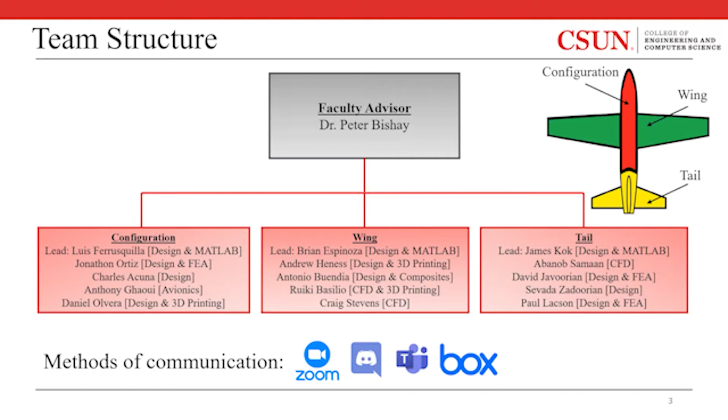And it's through these means of communication that we're able to complete every objective we set for ourselves, including first, designing a UAV that was capable of incorporating fully morphing wings and empennage. Second, designing proof of concepts for the wings and tail stabilizers that are capable of camber-morphing and non-stretchable skin. And lastly, manufacturing these concept models and performing actuation tests and wind tunnel testing.

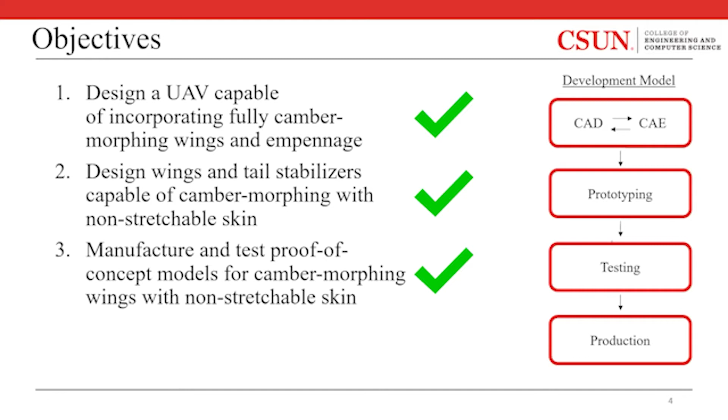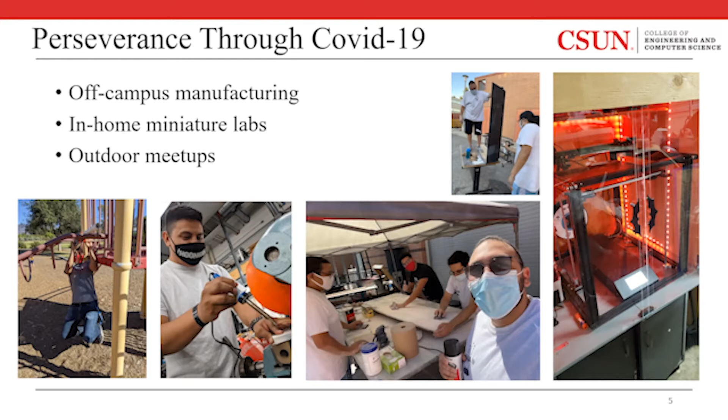And we succeeded with our objectives by using a standard computer-aided development model. We first designed our components using CAD software and CAE techniques, including FEA, CFD, as well as topology optimization, before eventually moving on to our prototyping and testing stage, and eventually developing our completed product. And none of this would have been possible without our team's dedication to doing great engineering work, despite the circumstances of these unfortunate times, where we completed most of our manufacturing off campus in self-made home labs, as well as having various outdoor meetups to stay as safe as possible.

And it was through this dedication and hard work that we're able to complete many milestones over the course of the year, including, as previously mentioned, the full actuation and wind tunnel testing of our proof of concept models, developing an in-house MATLAB application for dimension sizing of XM3, finalizing our UAV design, and the many conferences we've attended and awards we've earned.

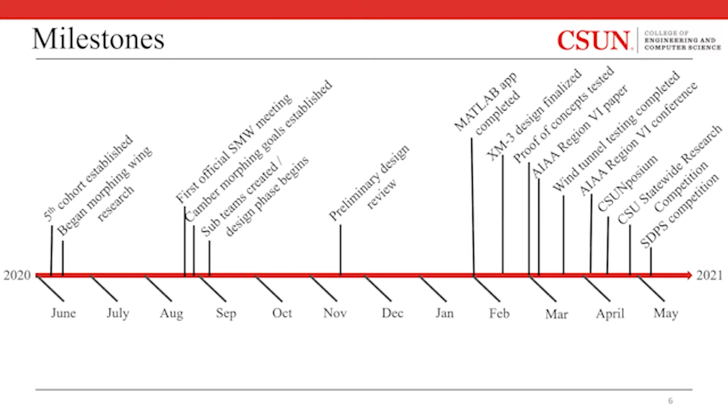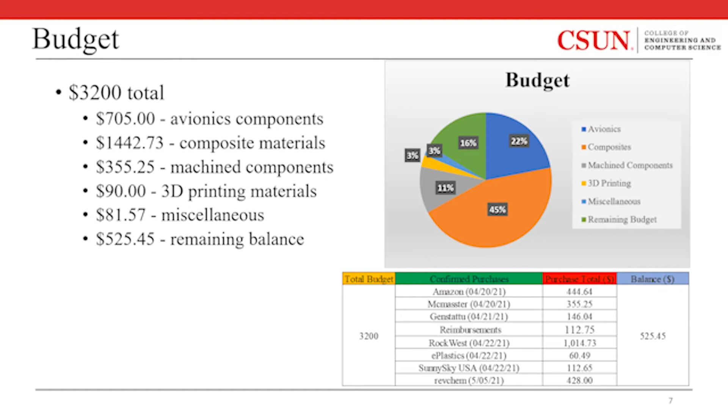And as for our budget, our team was allocated $3,200 to fund our project and research, where 22% of that was used for avionic equipment, 45% towards composites, 11% towards machined components, and 3% for 3D printing and miscellaneous items, which currently leaves us with $525 remaining, or 16% of our budget, roughly.

So now you're probably wondering, what is a morphing wing in the first place? So first of all, morphing technology is a concept of incorporating various surfaces on an aircraft that are reconfigurable during flight. If you look at birds, for instance, you'll notice that they're able to adapt their wings to better suit flight conditions. For example, they're able to increase their span, which increases their lift, or sweep them back to become more aerodynamic. And having these morphing abilities makes them much more efficient animals.

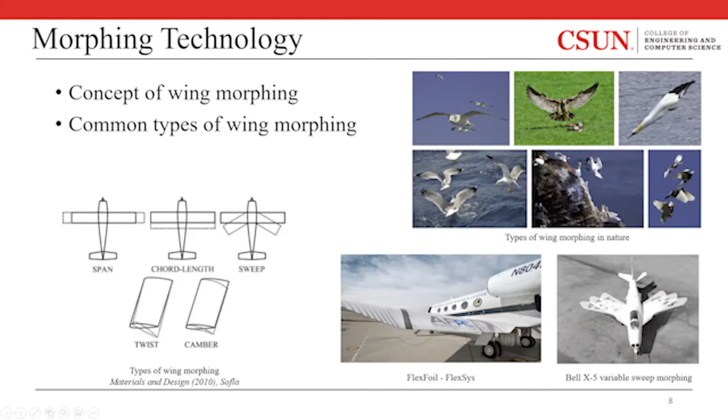And currently, there's a lot of research trying to replicate these capabilities with the intent of making aircraft more efficient in the same sense. For example, the Bell X-5 was an experimental aircraft that utilized variable sweep morphing. And currently, an aerospace company known as FlexSys is working on a FlexFoil, which is a type of camber morphing wing designed for full-sized aircraft, which is very similar to our research in that our team is also experimenting with camber morphing.

So a more accurate description of camber morphing is when the angle of the mean camber line is altered, which varies the amount of lift a wing can generate. And this allows the aircraft to maneuver similar to how an aileron or flap operates, except it uses a continuous surface and doesn't utilize a hinge joint. And having a smooth continuous surface greatly improves efficiency, which in turn can help reduce fuel consumption.

But the most difficult aspect of any type of wing morphing is making a skin that can resist aerodynamic loads and be flexible enough for morphing. Current morphing research tends to focus on stretchable skins such as polystyrene foam or polyurethane rubber, which is very weak to aerodynamic forces and tends to wrinkle from protrusions of the internal structures, which in turn leads to inefficient aerodynamic surfaces.

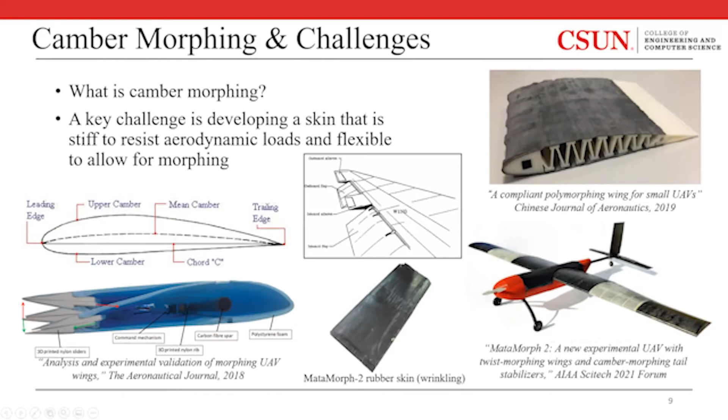So we present MataMorph 3. It's a fully morphing UAV that incorporates camber-morphing seamless control surfaces for the wings and tail. And we're solving this problem with the skin by using a laminate carbon fiber composite skin that connects to trailing edge slider mechanisms. And this effectively allows the skin to slide over the wing or tail, removing the need for the skin to be stretchable.

This also provides rigidity against aerodynamic forces during flight and a smooth continuous surface for the air to flow over.

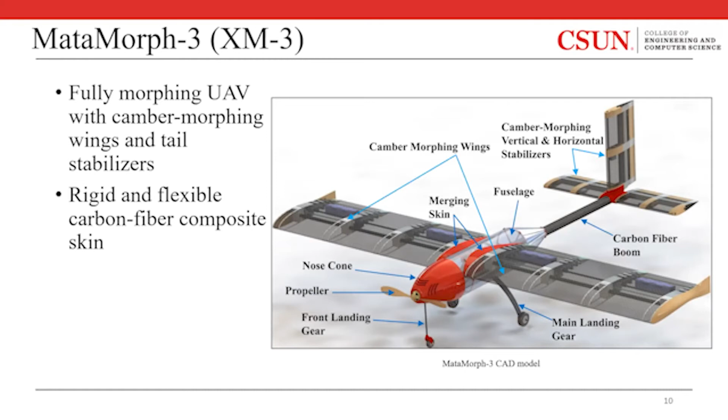And here's our innovative camber morphing design for the wing and tail. XM3 utilizes a laminate carbon fiber skin made of 2 plies of interwoven fabric that provide a rigid and smooth continuous surface. And our design also uses 3D printed skin supporting linkage mechanisms and trailing edge sliders to accommodate for the increase in surface area when cambering.

And the skin attaches to the leading edge of the rib and the trailing edge sliders to allow the skin to translate freely, and linkage mechanisms are placed between each pair of ribs to prevent separation between the rib and skin during camber.

And for the tail, a slightly different design was utilized, which involved trailing edge sliders that spanned the entire length of the trailing edge, as well as polyurethane foam sections, which acted as the linkage mechanisms in order to save weight.

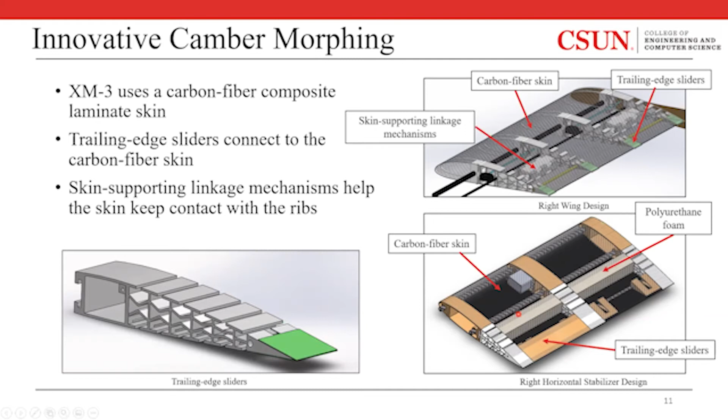So the design for the ribs is an improved version of the very well-known fishbone active camber design. But in order to further improve the design, we replaced the corrugated structures with V-lines and I-beams, which help reduce buckling along the central axis.

The actuation is then facilitated by a servomotor and a Carbitex CX6 ribbon, which runs through the rib and inserts into the trailing edge. And as you can see, again, the designs are very similar for the wing and tail. However, the tail rib utilizes a balsa leading edge to also further reduce weight.

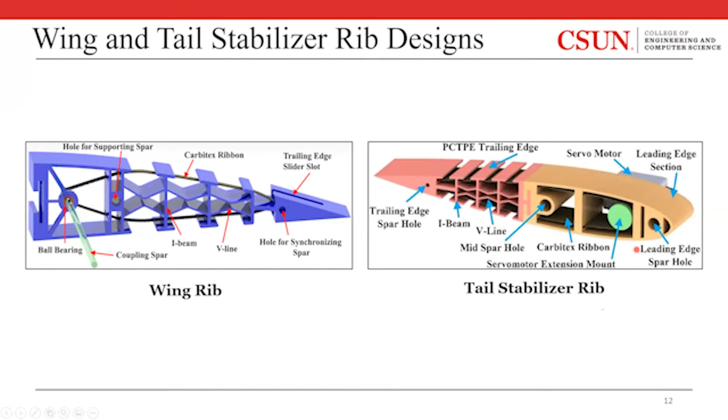So here's a design for our fuselage. It utilizes a carbon fiber central boom as the main support structure for the wings and tail, and the main landing gear made of 16 plies of interwoven carbon fiber, which is then fastened between two 6061 T6 aluminum bulkheads.

And as shown by the animation here, adjustable 3D printed ABS wing mounts made it possible for the wings to translate along the main boom, which allows the wing's position to be fine-tuned for the best location of the CG.

And here's a diagram of the avionic components of XM3. It uses an all-electric propeller-driven UAV that incorporates a Sunnysky brushless electric motor. It also utilizes two independent batteries, one to power the electric motor and the other to power the servomotors and auxiliary systems. And we're also utilizing a Pixhawk Cube 2 in unison with the GPS, as well as telemetry module to help gather data on flight characteristics, as well as our location.

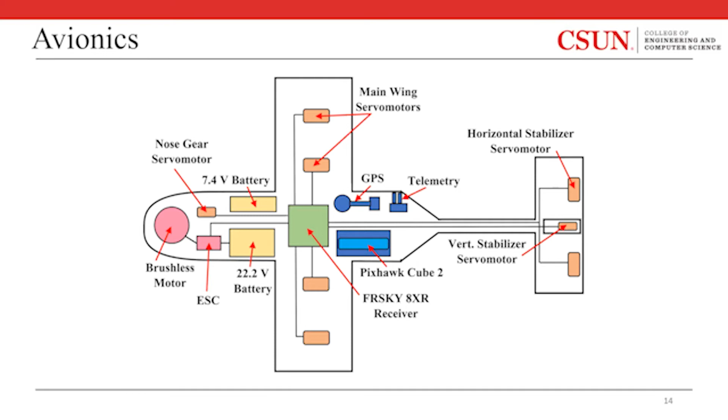And here's a preliminary design and sizing application that we developed in MATLAB and used extensively during the design phase for XM3. The app implements multiple tools with a graphical interface and 3D display to help determine optimal flight-worthy parameters for the wing, the motor, empennage, as well as center of gravity.

And the display updates in real time and allows the user to have a preliminary view of the UAV in order to intuitively assess the size of the aircraft. And I would really like to go more into detail about this application, but unfortunately, for the sake of time, we'll have to move on.

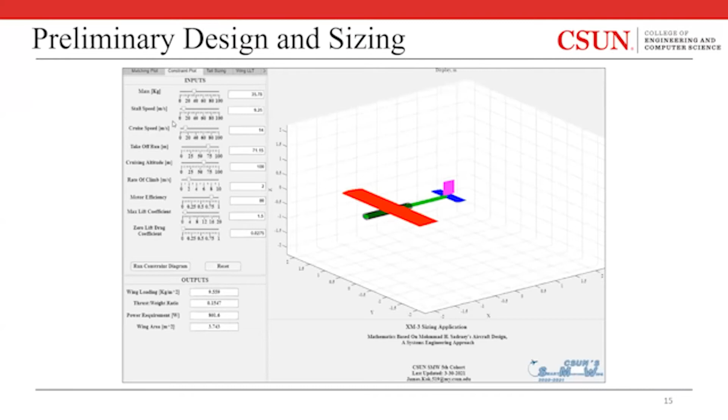The analysis of XM3 began with the bulkheads. The main and front bulkhead designs were refined using a new analysis tool found in SOLIDWORKS Topology Optimization Studies. The figures depict the optimization evolution of the bulkheads. The goal was to reduce the weight by 30% while maximizing the stiffness to weight ratio.

In each study, manufacturing constraints were applied such that the critical areas of the part were preserved. In the figure to the left, the area outlined in purple represents the preserved area needed to contour to the fuselage body. The central figure shows a mass reduction plot from the topology optimization study and illustrates which sections of the original shape could be removed for weight reduction.

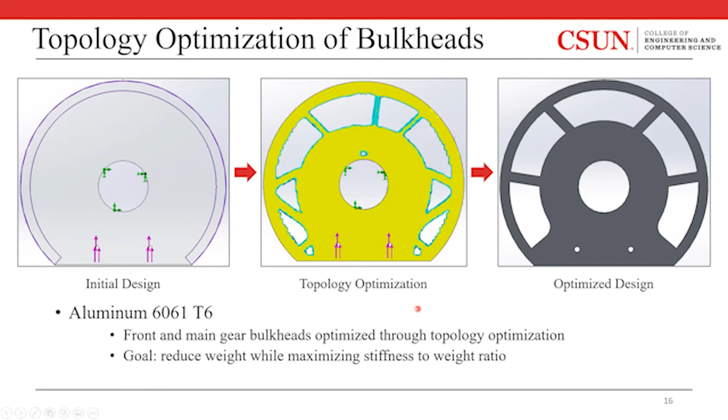The figure on the right displays the final bulkhead shape, which passed all FEA static studies with an acceptable factor of safety. Static analysis was conducted on the carbon fiber landing gear frame to determine the number of plies that would guarantee a suitable factor of safety.

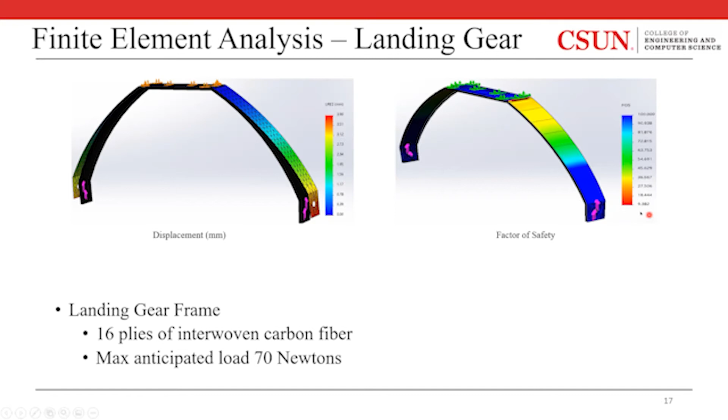A range of vertical landing speeds were considered, and a vertical load of 70 newtons was applied in a static study at the two ends of the main landing gear, where the wheels are attached. With the central part of the frame fixed as depicted by the figure, the applied loads resulted in a maximum displacement of 3.9 millimeters and a minimum factor of safety of 9.38. The mesh in all studies was refined until convergence was achieved.

Modal analysis on the frame was conducted to ensure that the anticipated excitation frequency during takeoff and landing, estimated to be between 20 and 30 hertz, is far from the first natural frequency, and to check if the mode shape results in any twisting of the frame, which would require several plies to have a 45-degree fiber orientation angle during the layup process. A conservative approach was taken in the modal analysis by defining no fixtures.

The first non-rigid body mode was a bending mode, shown in the animation on the left, and occurred at a frequency of 70 hertz. The second non-rigid body mode was a twisting mode, shown in the animation on the right, and it occurred around 170 hertz.

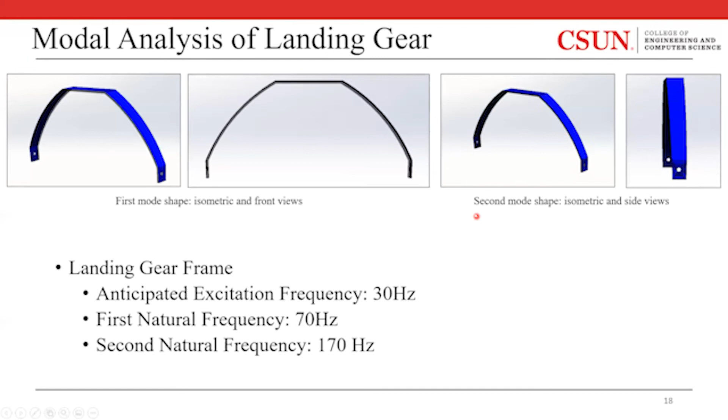Our analysis concluded that since resonance is unlikely to happen at this vibration mode, no plies with a 45-degree fiber rotation were necessary to implement into the landing gear.

The stress analysis for the carbon fiber skin aimed to show that the skin was able to withstand the maximum expected aerodynamic loads during flight. For this reason, a pressure of 495 pascals was applied for the study. The shell of the model consisted of two 0.3 millimeter thick interwoven carbon fiber plies. The figures show the resulting maximum displacement and factor of safety. The maximum displacement had a value of 0.098 millimeters and a factor of safety of 146.

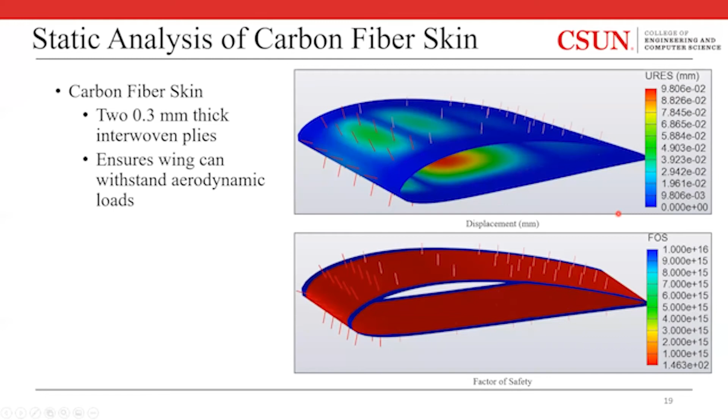The stress analysis for the main carbon fiber spar aimed to determine the minimum acceptable size that would be able to withstand the weight of the UAV. The model for the study had an outer diameter of 13 millimeters and was made up of 7 unidirectional carbon fiber plies with a stacking sequence of 00, 90, 90, 90, 00.

The spar was fixed like a cantilever beam and had an applied weight of 5.66 kilograms, roughly half the weight of XM3. The results showed deflection of 5.6 millimeters at the tip of the wing with a factor of safety of 33, indicating that carbon fiber tube of this composition would be suitable. We purchased a tube from Rock West Composites that offers similar material properties.

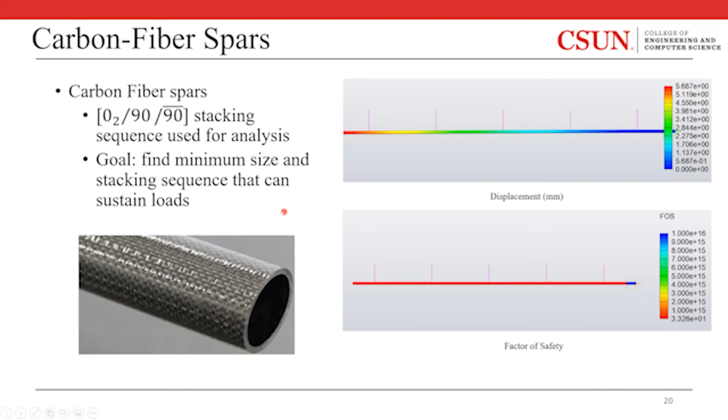ANSYS Fluent was used to carry out 2D static CFD simulations on the airfoils of both the wing and tail at different angles of camber. Each simulation had a flow domain of 7 meters in length by 4 meters in height. These dimensions were chosen to simulate a wind tunnel experiment, as well as the expected flight conditions, including the air properties at sea level. The inlet velocity remained constant at 20 meters per second.

A triangular mesh was used with a 0.1 meter element size along the outer boundaries and approaches sizes of 0.005 meters along the outer surface of the airfoil. The table shows the results of our ANSYS studies when they converged. The NACA 4415 values are a reference against established values by NASA. For our studies, the max aerodynamic efficiency peaks at 5 degrees of camber with a value of 30.63.

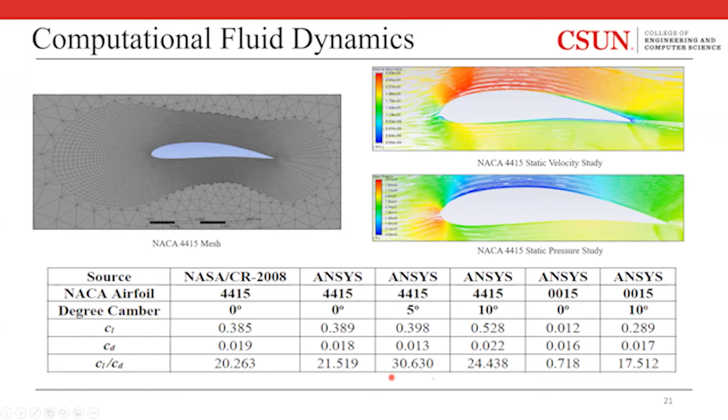We completed an actuation test for the wing model in the wind tunnel at school. The test showed that the wing was capable of cambering with applied aerodynamic loads at speeds of 40 meters per second, and that the skin was resistive to these loads as well.

Shown here is the expected flight path we plan to take with the help of our pilot at the Apollo airfield. The flight mission consists of performing a successful takeoff and landing, as well as having a flight time of 5 minutes. The main goal of this flight test is to demonstrate the effectiveness of camber-morphing.

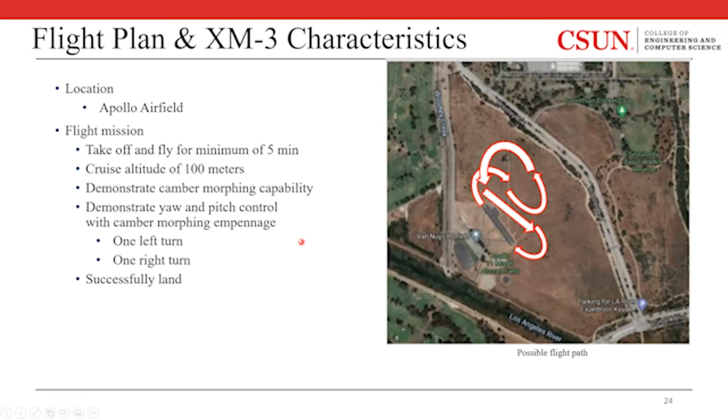Next, I would like to highlight everything that the 5th cohort has accomplished. First, we placed second at the 2021 AIAA Student Conference, going up against schools such as Caltech and USC. We also placed second for the 10-minute presentation segment at the CSUNposium this year. We were also selected to represent CSUN's College of Engineering and Computer Science at this year's CSU statewide competition.

Currently, we're in the process of finishing up the manufacturing of our UAV. We were able to manufacture one carbon fiber wing, however, it still needs to be cleaned up and sanded down before we can continue with the full assembly. As mentioned before, once the UAV is fully assembled, we will be performing the flight test. We also plan to submit our research paper for publication in a scientific journal.

I would like to thank the 5th cohort of the Smart Morphing Senior Design team for their hard work and dedication to the project. Given all the current restrictions, we are extremely proud of the work we were able to accomplish. I would also like to thank our advisor on this project, Dr. Bichet, for his guidance during this school year. Thank you, and any questions?

I have a question. What benefits do you see with the morphing wing versus a traditional wing or a fixed wing? So the main benefit of a camber morphing wing is that the skin is a continuous surface. If you take an aileron from a traditional wing, you'll notice that it has that hinge joint where it actuates. So by removing that, we can now have our skin be continuous, and the air will be able to flow over smoothly. We'll be able to maintain that boundary layer, so we can generate more lift effectively.

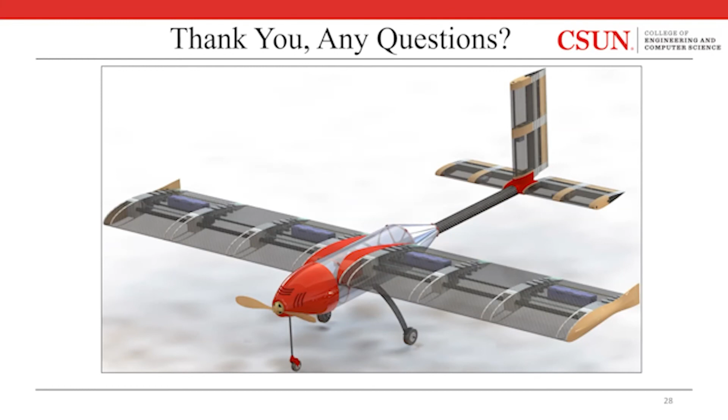Right. I did have a question about the wind tunnel results, like what data did y'all collect in the wind tunnel, and did you do any corroboration back to your analyses and things like that? So the main purpose of our wind tunnel test was just to ensure that our model was able to camber when subjected to these applied loads. We haven't collected any further data yet, but that's something we plan on doing.

Got it. So you weren't doing an aerodynamic study. You were just making sure you could actuate the camber. Correct. Unfortunately, our wind tunnel isn't fully functional yet, so we're not able to get that data yet. We would have liked to have that data. So for this test specifically, it just served as an actuation test.

Right. Any other questions from the audience? Well, did y'all show a top level schedule for when you're trying to fly and things like that? I don't know if I missed it, or if you have some dates in mind. Just curious what kind of timeline this might be on. So pretty much our timeline right now is get everything done as soon as possible, so we can do our flight test as soon as possible as well. So we don't have an official schedule. It's been very difficult trying to manufacture everything outside of campus. So we're just trying to get everything done as quickly and effectively as we can before we do our flight test.

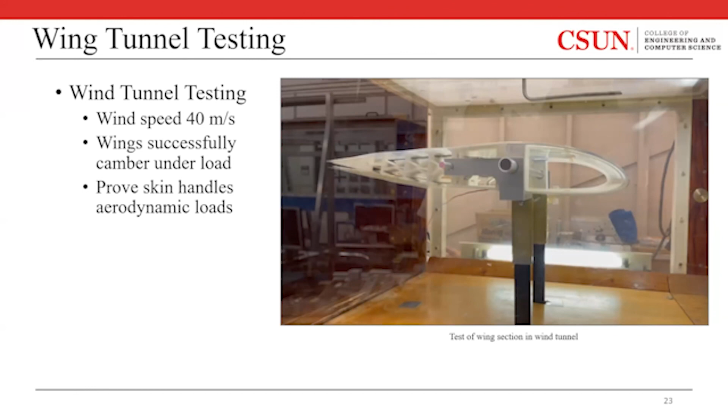Yeah, hi. At least with regards to the fuselage, I know in the previous cohort, an issue with the fuselage was the rigidity of some of the structural components, and that is the reason why we chose, for example, the central boom to be carbon fiber, because for our test pilot, that was one of the main issues from the previous cohort: his concern was that the structure itself was not stiff enough. So we opted to choose a carbon fiber boom, so that way the stiffness of the structure would not be an issue.